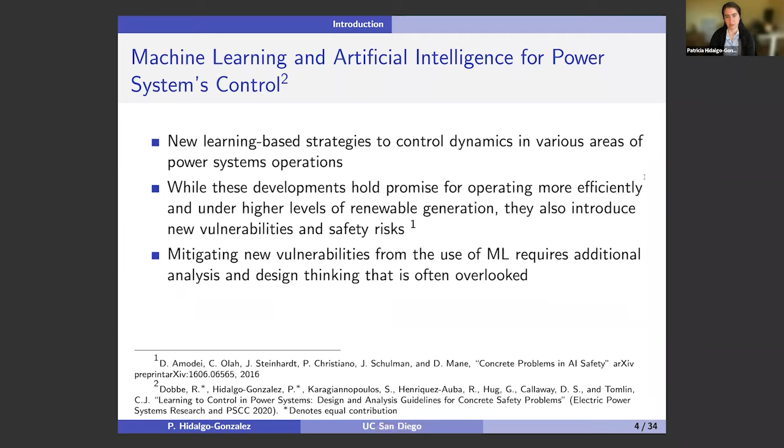But then on the other side of the coin, is that given that we're using now these data-driven methods, they bring vulnerabilities and safety risks that we didn't have before when we were only doing model-based approaches or engineering approaches in the classical way that we used to think. So mitigating these new vulnerabilities from using these machine learning techniques requires extra analysis and design, which sometimes tends not to be done in this intersection, and we need to start doing that more and more.

And there are many examples in this space, and in particular, in this paper that I'm basically talking about today, we do have a large section where we go over the different domains in power systems where these learning techniques have been used for controlling different actions in different contexts, for example, frequency regulation, voltage control, OPF, demand response. And there we look at those contributions from the critical lens: on one hand, what are the contributions of now using these methods instead of the classical methods? But then on the other hand, looking at what are now the new vulnerabilities and aspects that are arising from using these data-driven methodologies.

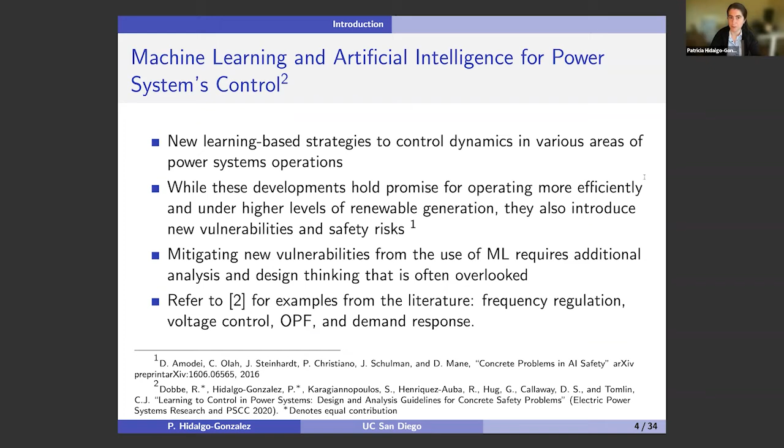So now let's review what are these risks that I'm mentioning. And from here, we take some of the language and concepts from the AI community, and we apply them to power systems. Specifically from the paper from Amodei and their co-authors, and also Leike and his or her co-authors, they characterize specific safety concerns that arise as we're all working in learning-based control, and we apply them to the context of power systems.

So the first one, it's avoiding negative side effects. So this comes from the fact that when we're using a machine learning model, it's optimizing the actions according to some objective function that we define and some constraints that we define. And usually that's going to be informed from the expertise of the domain in particular that we're applying this technique to.

However, given that we can only choose an objective function with certain characteristics or design, and the same for the constraints, we will never be able to capture all possible behaviors of our physical system. And that could bring some aspects of getting into an area that we haven't explored, that we were not able to model with the constraints that we have. So then that makes our algorithm not robust, no matter what's happening.

Another risk that's super important when we're looking at machine learning techniques in the context of control for power systems is to make sure that we're doing persistent excitation and safe exploration. The question this poses is how can we make sure the training data we're either obtaining or creating represents all the possible conditions we could be under, especially the safety critical cases?

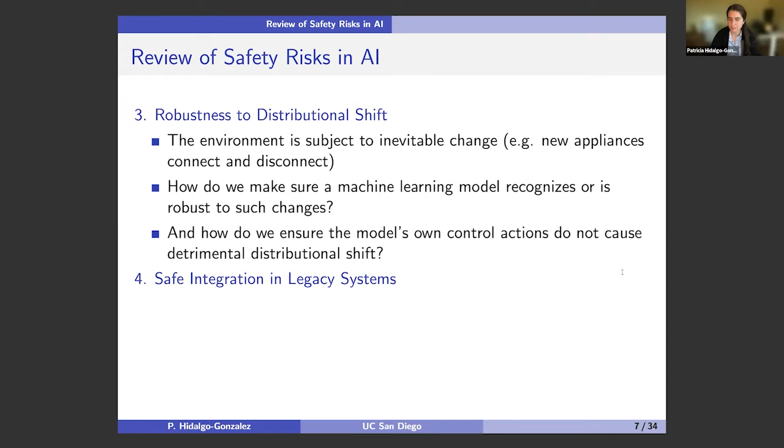And last but not least, here in power systems, we're working with a legacy system. And that brings a new set of challenges, which other types of domains don't have to deal with.

For example, in robotics, when you are implementing machine learning algorithms to control your motion or path planning, you don't have to make sure that your controllers are compatible with a pre-existing machine, because you're basically modeling from zero, creating a new device.

But in the case of power systems, that's not the case. We are now bringing new controllers, but to an existing grid, and in many cases, that network has been operating for over 100 years. So it has a lot of different layers and aspects. We have to make sure that any new control mechanisms we bring are complementary and interact well with the control mechanisms we already have in place in the grid.

And in that regard, the other aspect is that as of now, the expert in the room is always going to be a human. So we need to make sure that the human operator can safely override any of the control mechanisms we might have, especially if you're getting into safety critical aspects that you don't expect the controller to work better than a human's experience would know. So we have to design these mechanisms in a way that the operator can take over if needed.

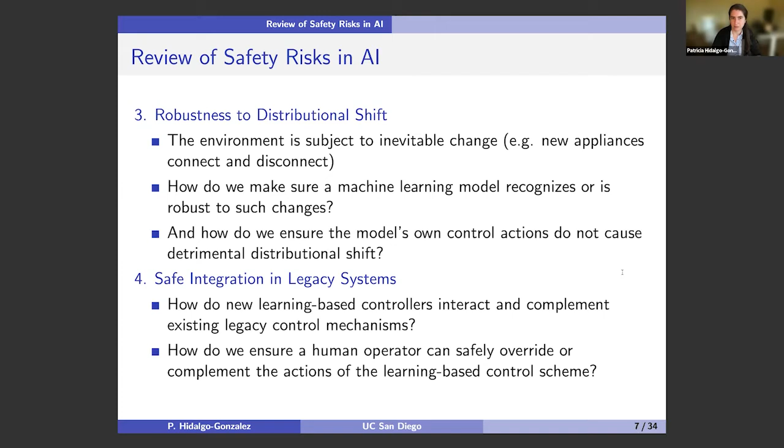All right, so now that we've reviewed these different safety risks, let's look into one case study that's looking at frequency regulation as inertia changes over time because of renewable energy integration. And then I'll highlight what the safety risks were that we identified and how we were addressing them with this case study.

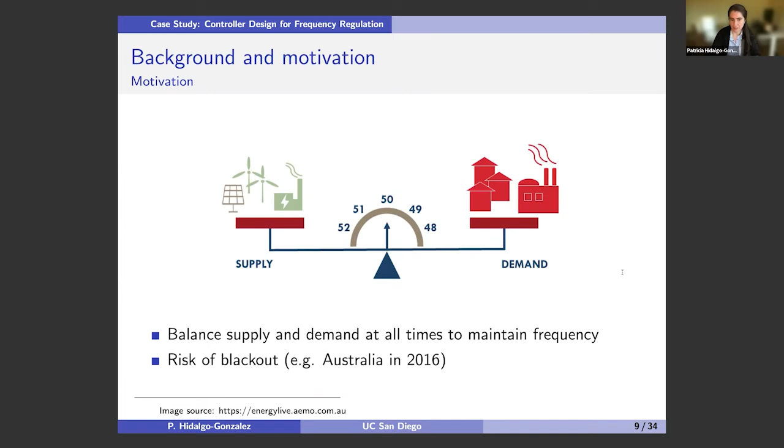Okay, so as we know, we need to balance supply and demand at all times to maintain frequency at the operational point we want it to be. And if we don't do that, we're risking a blackout. There are several cases by now, and one example was the one in Australia back in 2016.

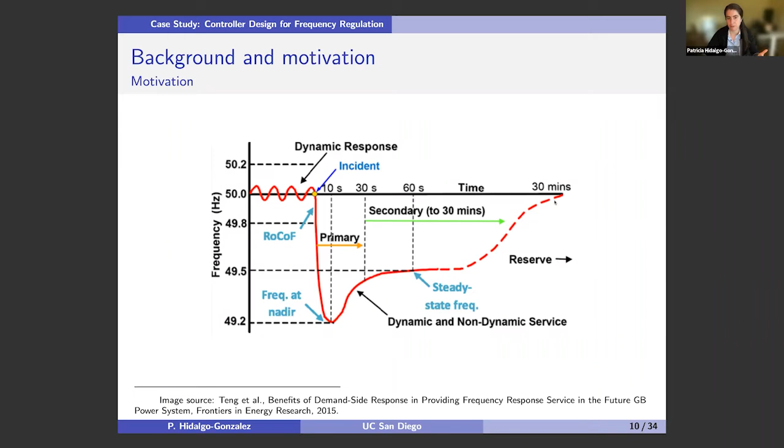Then we have different control mechanisms that kick in, such as the primary control. Then the secondary control takes over and relieves the primary control. And then we have reserves that start kicking in, and then we start redispatching. So then we can free these different units providing the primary and secondary control, and just rerun our OPF so the generators can provide and adjust to this new change.

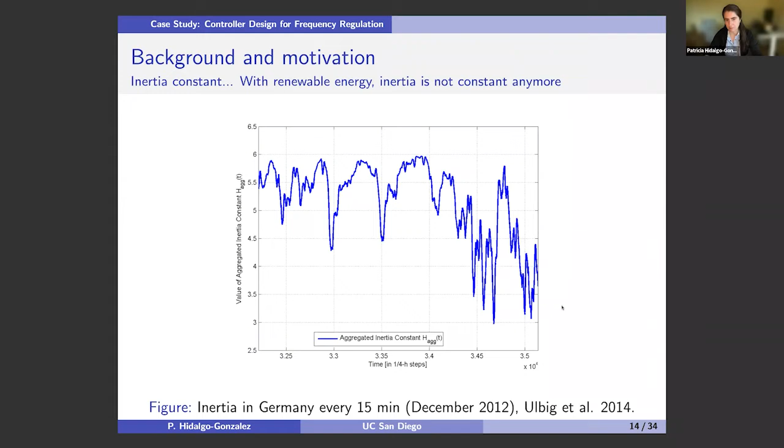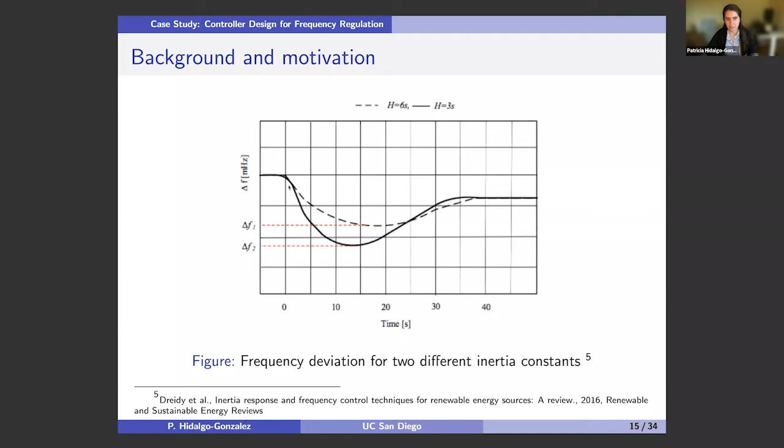So what we had before, where we assumed the term M was fixed, we cannot do that anymore. We're no longer working with that linear system, but something a lot more complex. Here's an example of what happens to the frequency response, y-axis versus time, as we have different values for inertia. When we have a higher inertia value, it provides more resistance in the grid against frequency deviation. So delta F1 in this example is smaller than delta F2, which occurs with lower inertia in the grid.

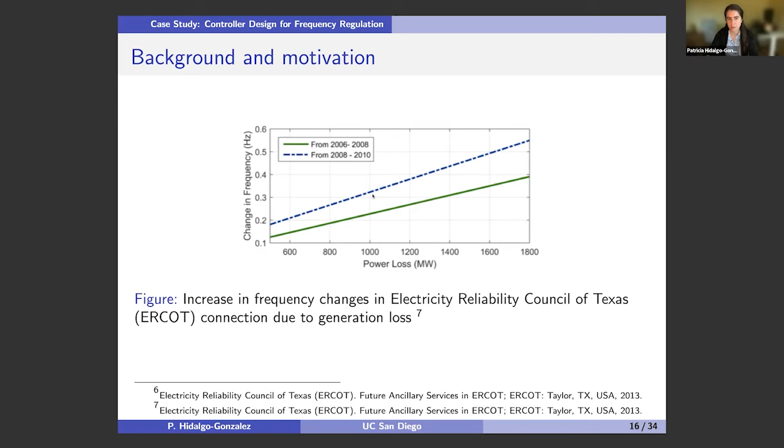And in this other example, it's from ERCOT. Even though this is data from 10 years ago, one of their reports already showed that for a given power loss, over a difference of 2 years, the change in frequency was increasing quite a bit, even though they were experiencing the same power loss. That was explained because now they had more wind power, so therefore less inertia in their system.

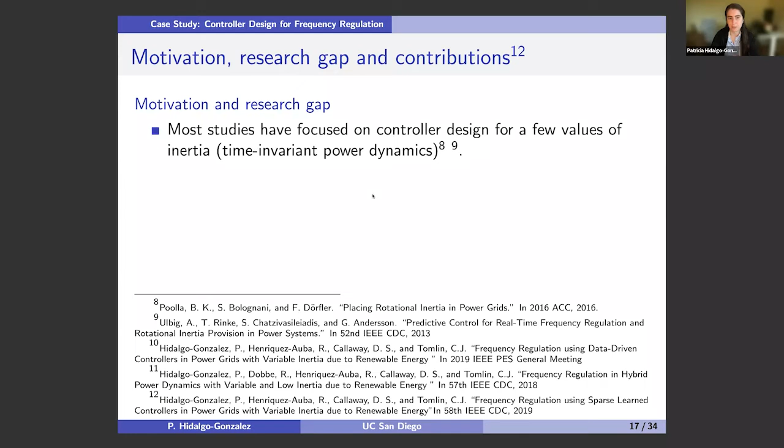This brings me to the research gap that this case study was addressing. Most studies have been focusing on controller design for a few values of inertia, but they were assuming that the dynamics were time invariant, basically assuming that inertia was constant, and then testing it for a few different values.

In previous work, we were able to design via learning a fixed and stable frequency controller, but now for these new time-varying dynamics that I'll introduce shortly. These new dynamics that we're proposing do capture how inertia changes over time, so we can have controllers that are robust to that time-varying aspect, given that we're not working anymore with a linear system. The next part of the contribution is that we are aware that information entails a cost, because we need to sense the information and then broadcast it. So designing sparse controllers, that require a low amount of information, is something we do desire in power systems.

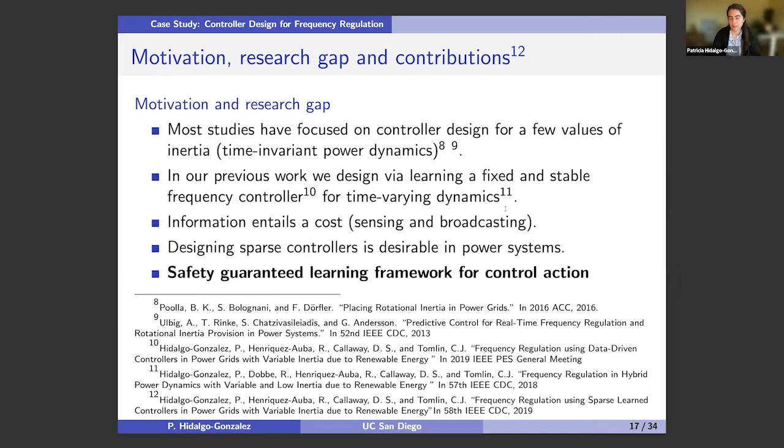With that work and motivation, we're able to propose a framework that has safety guaranteed when you're learning a controller in the context of frequency regulation. So we're able to design a sparse and guaranteed stable time-invariant frequency controller for the new time-varying power dynamics.

We also test the improvement in the performance of that controller and in the stability as we introduce more features for the controller to use, or give the controller more access to information. So we can understand that trade-off between having more information and better performance and stability, versus having less information and how that affects our performance.

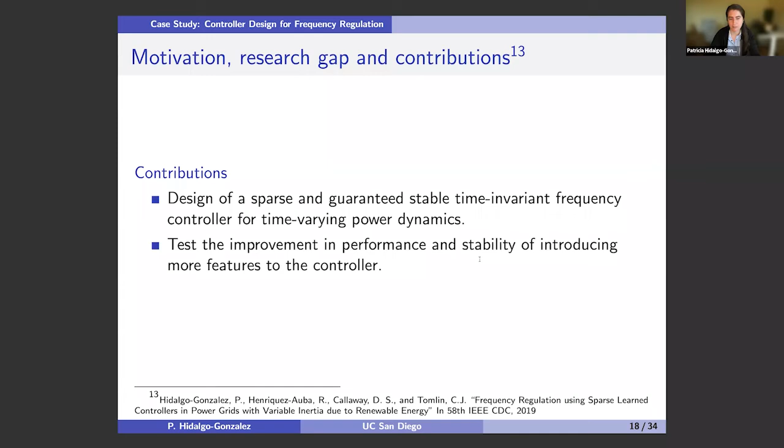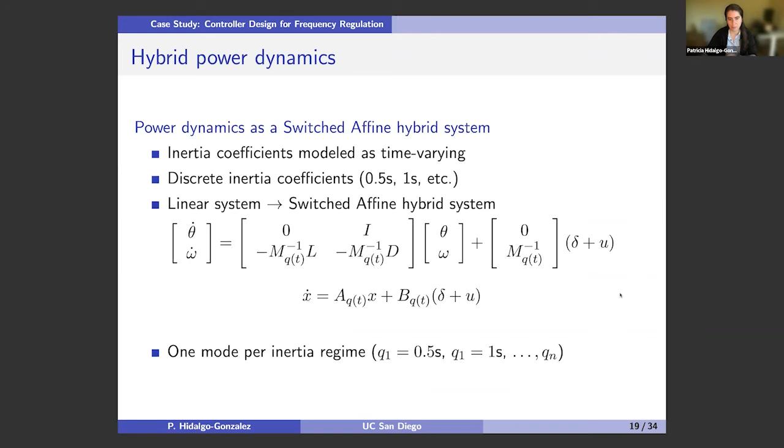So classically, using matrices A and B, they're going to be time-varying because of the inertia changes over time. This would be our matrix A, our matrix B. We're using one hybrid mode per inertia regime, going from low inertia, as low as 0.5 seconds for example, all the way to a high inertia of 9 seconds. We let inertia change over time in our simulations, and we design a controller that would be able to bring frequency back to the nominal point, regardless of how the inertia evolves throughout the day, for example.

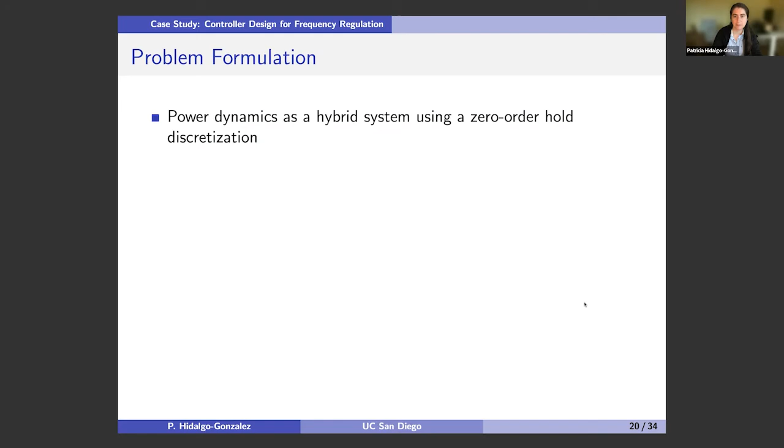So now, formally talking about the problem formulation. We're modeling power dynamics as this hybrid system, using a zero order hold discretization. We represent with X the vector of discretized angles and frequencies.

We generate a training set from solving the MPC for this frequency regulation problem. Given that X measures the deviation from the nominal points for phase angles and frequency, we want to minimize that deviation. So we minimize this quadratic expression because we want it always as close to 0 as possible, and we're also minimizing the usage of our control action, using it the least amount possible to minimize cost.

Our control action would be power injection or power absorption if we have a battery, for example, depending on what's happening with our demand, so we can always match our supply with our demand.

Then the constraints are the dynamics of our system. We have an initial condition for the states, where our frequency is starting and where our phase angles are starting, and then basically the dynamics of our system.

Here we're working in discrete time, so we can capture how our states are going to be changing given a certain initial condition. We assume the initial condition to be removed from the nominal point, so we start in a safety critical operational point with the frequency deviated by a certain amount.

From solving that training set, now we want to fit a controller via learning, because in reality, in frequency regulation, the dynamics are so fast that we cannot implement a real-time MPC to control that type of problem. So this is just for training, creating the training data set.

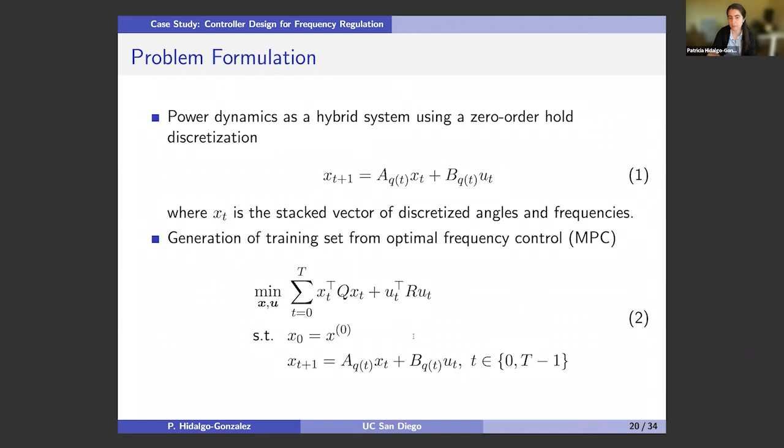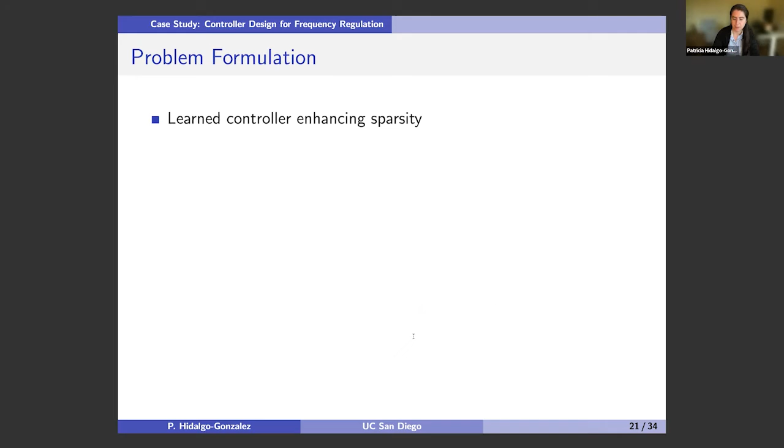The objective of our controller is that we want to learn a controller that enhances sparsity, so it doesn't require as much information from the network. We want to understand to what extent communication between the nodes can be restricted, and still be able to design a stable frequency controller.

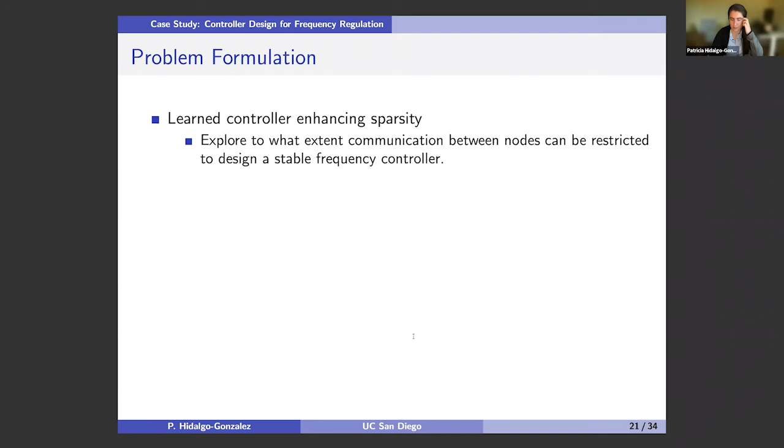Meaning, do we need information from, say, the nearest 3 nodes around us, or do we need more information, the nearest 5 or 10 nodes, depending on our topology? That's the question we explored.

To understand that, the strategy we use is to create this optimal training set from solving the MPC I just showed. From that MPC, we get optimal pairs of states and control action for a set of different scenarios S.

These scenarios capture different trajectories for our inertia, in different ways that matrices A and B from the dynamical system can change, rich enough to capture a wide variety of possible evolutions of the inertia in a system. This scenario S also captures different initial conditions for our system.

Basically different critical operational points where our frequency was deviated by a certain amount of hertz, for instance, so we can learn what to do in that critical case so we can go back to the nominal point.

Using this training set, we can learn, or try to fit, a controller that is linear on the states. To do this, we use a lasso regression for each node I in our network.

We assume that each node can have its own independent controller, which is why we're indexing it by I, the node, as a function of time, and we're hoping to fit a controller that would be linear on the states of the entire system.

We're trying to find this vector beta I, and we'll have a specific vector for every node I that we have, so a specific controller per node, and this vector is constant.

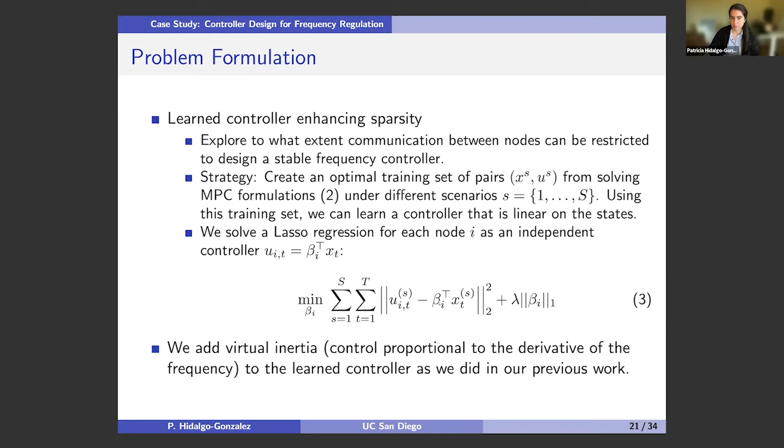Here we're posing the lasso minimization, where we're trying to fit from these optimal pairs obtained from the training set from solving the MPC. We have optimal control action and optimal state, and we're trying to find this vector beta for all the nodes I, penalizing the components of beta using the one norm on it.

And then we're penalizing with a certain weight lambda. We're using the one norm because this gives a binary behavior for the resulting beta, where the components are either going to be non-zero or 0. This is not the case if we would have used the 2 norm, which doesn't have that binary behavior.

So you would have some components in the vector beta that could be like 0.03. With that type of number so close to 0, it's not as helpful, because we want to force using the least amount of information. So we want to penalize the one norm so we can have more binary behavior from the controller beta, meaning that in some cases we're going to have, let's say, 5 non-zero components in beta, and they're not going to be close to 0. And for other components, we're going to get exactly 0.

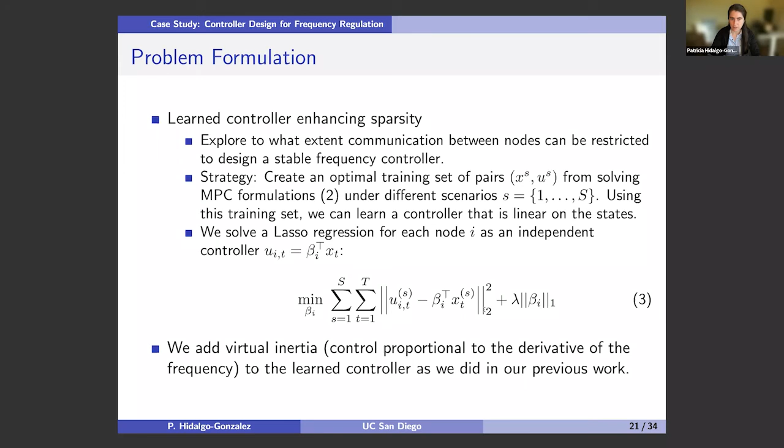And then after fitting this linear controller, we add virtual inertia, which is a control proportional to the derivative of the frequency, as we've done in our previous work.

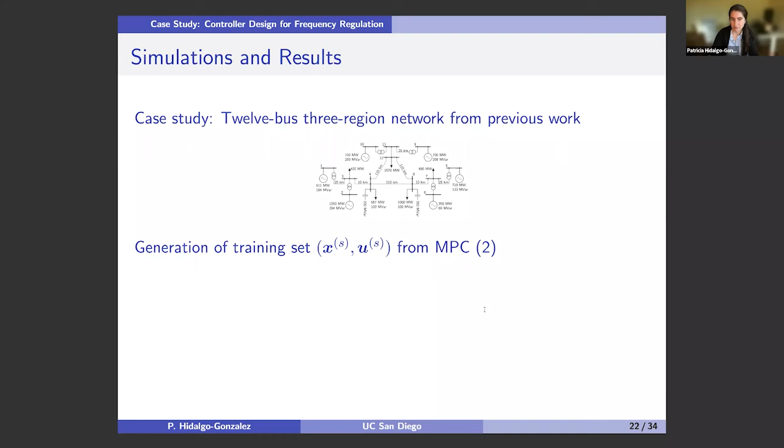So first we create the training set where we get optimal states and optimal control actions from the MPC. And here are the parameters that we use for the simulations.

And then for each scenario, we are randomly drawing an initial condition for the frequency deviation with a normal distribution with mean 0 and standard deviation 1.3 Hertz. So this is rather aggressive in terms of frequency deviation.

And then we simulate 400 scenarios to be able to capture a rich enough data set on how the inertia could change in the system. Then we assume that to be exogenous, we're not modeling that—that's happening also randomly. And also so we can have a rich set for initial conditions of frequency deviation.

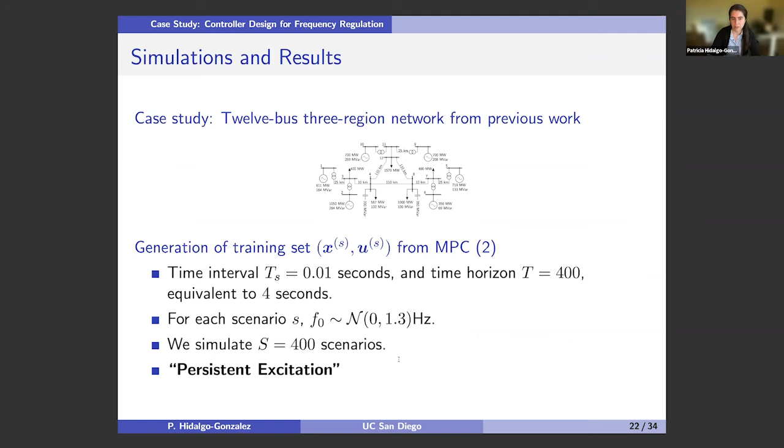So with this, we're trying to use this concept of persistent excitation, by trying to have more cases, or a rich training set of different conditions that we could be facing.

And now in the part of learning the controllers, we're optimizing the lasso regression, and we're using 100 possible values for the regularization parameter lambda. That's basically penalizing how many components cannot be 0 in our vector beta. And we use a tenfold cross-validation so we can get robust results.

And then from that experiment, for our analysis, we choose a subset of controllers. Specifically, we choose this controller by the number of features that they're using. So we use the case of when you only are using 4 input features in your controller, when you're only using 5, then 6, 10, all the way up to using all the 22 states that we have in our network.

And these 22 states come from the fact that we have a network that gets simplified to an 11-node network, and then each node has 2 states, the phase angle and the frequency, as I was mentioning before.

And then to all the learned controllers, we add virtual inertia as in our previous work. And this goes in hand with the concept of trying to avoid negative side effects. I'm going to get into a little more detail on this one as we go through the analysis of the results.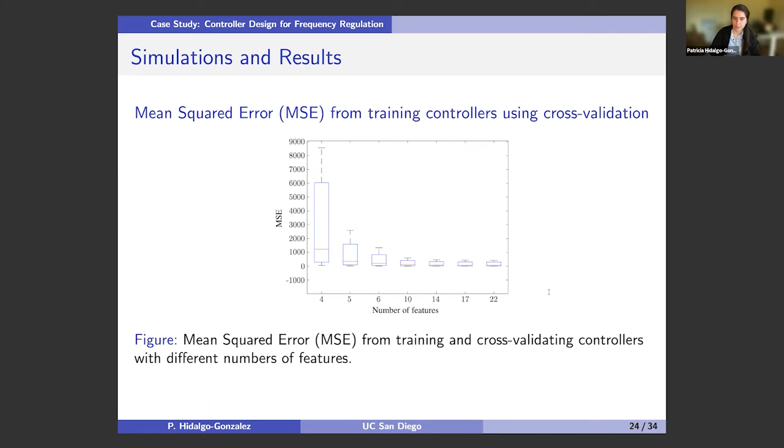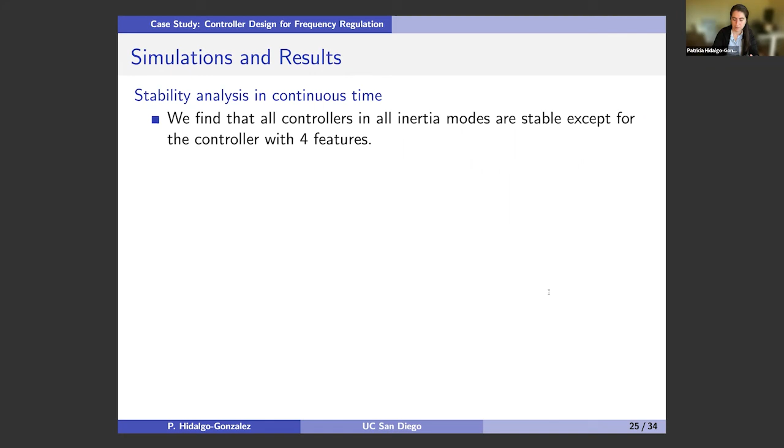And now we're fitting this controller for a dynamical system. So we need to look at stability to make sure that we're using a good controller for our dynamics. After fitting these controllers, we realized that all the controllers in all the inertia modes were stable, except for the controller using only 4 features.

To guarantee stability in a linear system, we need the real part of the eigenvalues on the left-hand side of the plane—basically negative real numbers. All of them are on that side except the controller with 4 features, where some values are positive. So the system's not stable in that case.

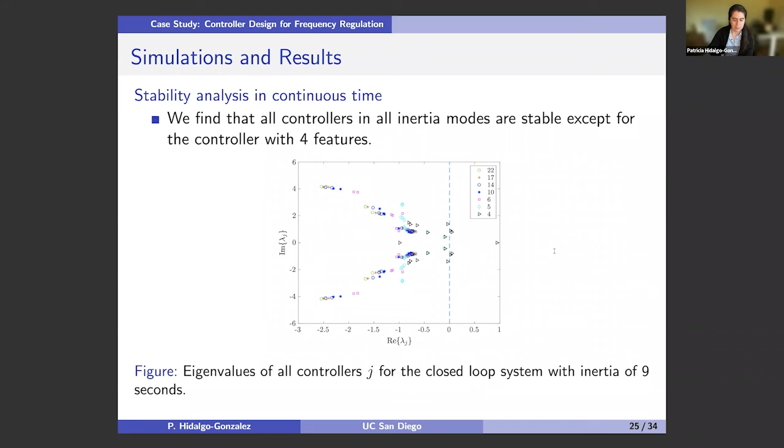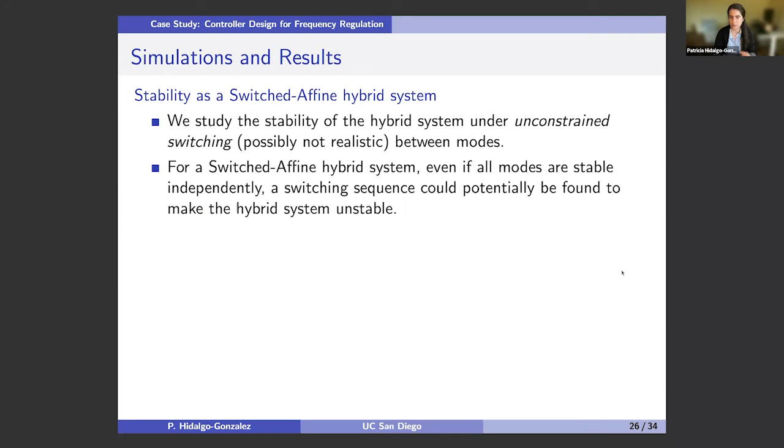But that being said, we're working with a switched-affine hybrid system, so now we need to understand stability for the hybrid system under any possible switching. We know that even if all the modes are stable independently, there could be a switching sequence that brings instability into the hybrid system. So we need a different framework to assess stability for the hybrid system—for that, we use the Lyapunov approach.

We're trying to find a common Lyapunov function that ensures global asymptotic stability. We can do that by solving this convex optimization problem, where these constraints force the matrix P to be positive definite, so it complies with being a proper Lyapunov function.

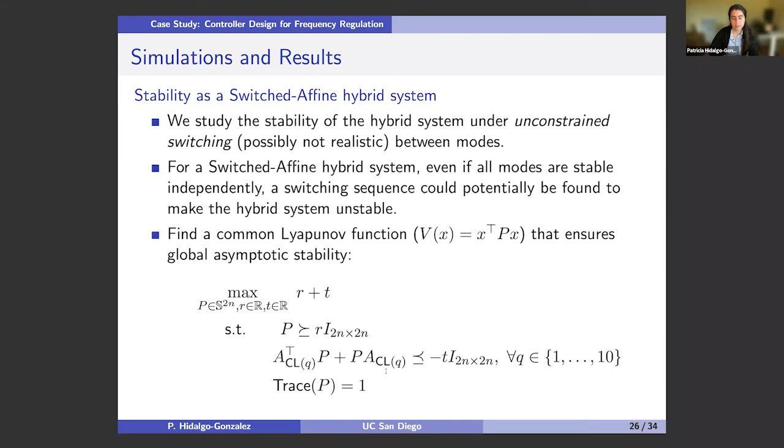This matrix here is the Lie derivative of the Lyapunov function, and we're forcing it to be negative definite. So in the end, if we're able to find a positive R, this P would be positive definite. And if we're able to find a positive T, this derivative of the Lyapunov function would be negative definite. We will be able to say that we are stable.

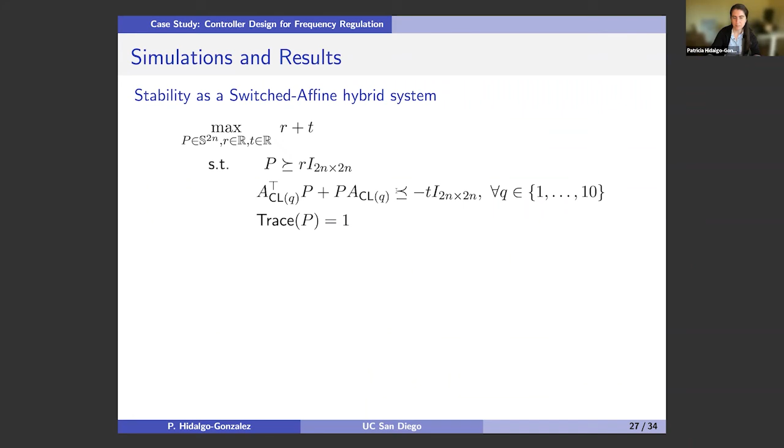So basically we would be guaranteeing global asymptotic stability. Here's just written what I was saying: positive R forces P positive definite, and positive T forces the derivative negative definite. So we will be able to guarantee global asymptotic stability of the system.

So now let's see what happened numerically with the dynamics and controllers we designed, which is all captured in this matrix A_CL for the closed loop. This constraint is for all the modes of inertia that we have, so we can find a unique Lyapunov function for all the modes.

So a unique P. In this case, we realized that controllers with only 10 features or more achieve this global asymptotic stability, but we can't say the same for those with fewer than 10 features. Even though controllers with 6 or 5 features showed good performance and achieved stability on every inertia mode independently, they were not able to show global asymptotic stability when considering the hybrid system as a whole. So we need at least 10 features to truly guarantee stability in this type of system.

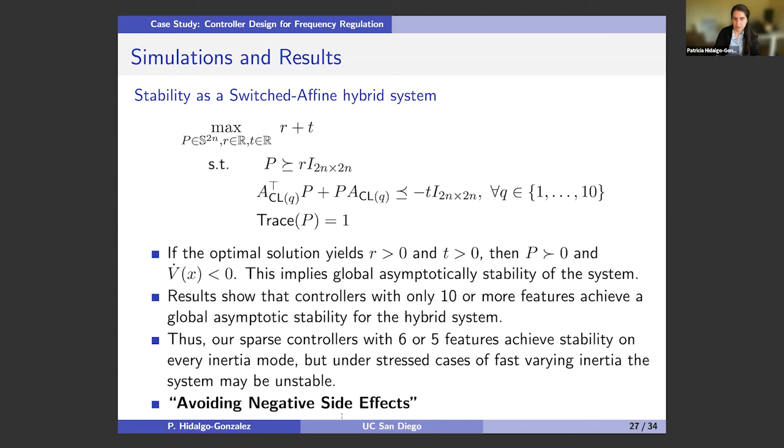By doing this check with the Lyapunov condition, we're again stressing the concept of how we can avoid negative side effects—if we don't check for stability, we wouldn't be able to guarantee anything. But with this, we're leveraging the power of data-driven techniques while also using the classical approach from control theory to guarantee stability.

So for conclusions of this case study: we were able to reduce the number of features in the controller all the way to 5 without impacting performance and stability for any fixed inertia. Increasing information beyond 10 features did not enhance performance or stability metrics. And we showed that using at least 10 features was necessary for global asymptotic stability.

So in this case study, we showcased how to avoid negative side effects by guaranteeing stability, and how to design a training set that has persistent excitation so it could be robust in the case of critical states.

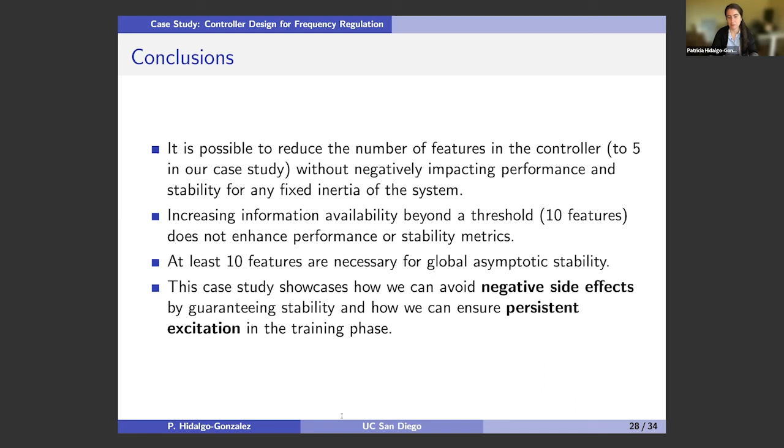Now moving into the guidelines on how we can address this safety risk, not only from the case study, but more broadly speaking. In the case study, we see the example of 2 of them.

There's a lot of work at the intersection of the question: do we want offline training or online learning? Online learning can definitely help us achieve more sophisticated behavior. However, if we just use classical approaches, they lack safety guarantees. Although now there has been some work addressing how we can embed these guarantees into online learning.

Offline methods may be easier for us to start embedding these safety guarantees that we require, either a priori, during training, or after the fact. Hybrid modeling is also becoming very popular, where we incorporate the physics of the system and the safety constraint as early as training.

Another technique to prevent this safety risk is variable partitioning. This is a way to characterize our state variables in such a way that we split them into two different groups: one that would create problems if used as input features, and another that would not. For an example of how we can do that, refer to the paper, where we looked at the challenge of policy shifting and how to wisely choose input features from our own states so we don't incorporate more challenges.

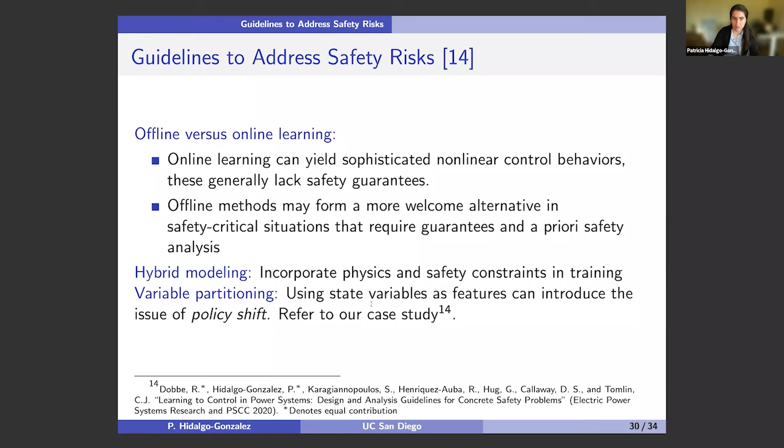Another topic that's been very popular in the last 5 years or so is safe learning. There are different ways to implement this. One idea is to first identify the unsafe set of states and control actions we want to avoid, pre-calculating that offline, basically where we don't want to be. Then we construct a safety controller based on that, for example using reachability, and switch between learning or exploration mode and safety control as we approach the boundary of the unsafe set, so we can avoid getting into it while still leveraging the benefits of online learning otherwise.

The other approach that's very popular, and I think has a lot of promise, is embedding these stability guarantees already in the training, or adapting the controller after training, as I showed in the case study.

In the case of power systems, given that we're working with existing infrastructure, we should design controllers that are interpretable and have few input variables. That makes it easier to interact with system operators, because if the controller can be interpreted and isn't a black box approach, we can have more trust from operators and the expertise around power systems, rather than a black box approach that brings more risk since less analytical analysis could be done. Using fewer variables is also desirable, giving us a less intricate controller that's simpler to analyze and implement, given this cyber-physical system has already been in place for several decades.

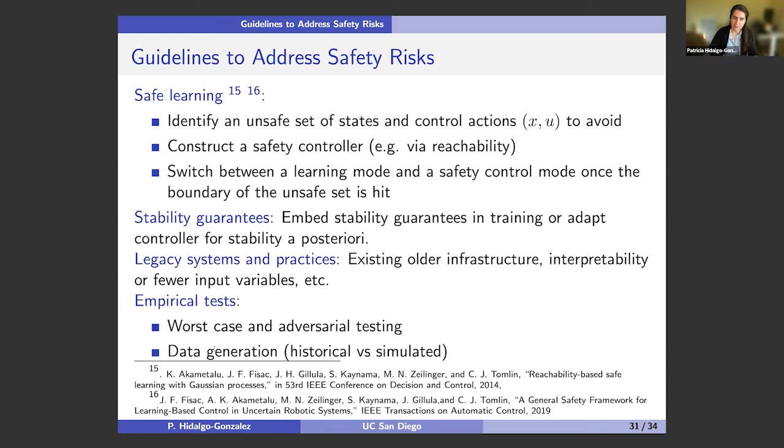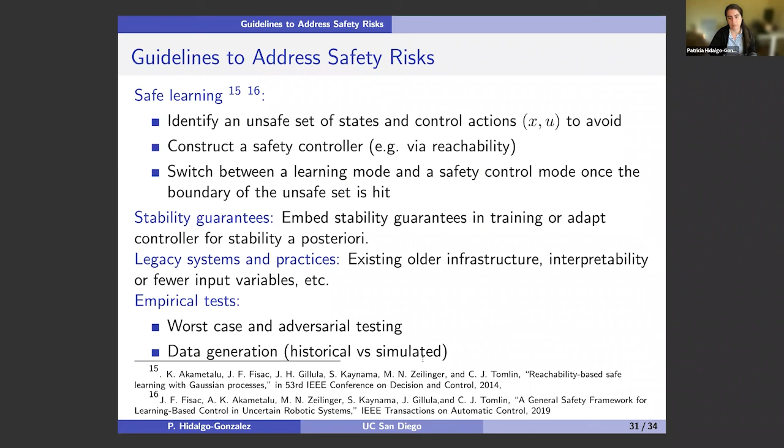In terms of empirical tests, we definitely need to look at the worst case scenario and even take it further with adversarial testing, to make sure our controllers are robust. We also need to be mindful of how we generate the data, as I discussed at the beginning of the talk, how we can use historical data and simulated data to get the best of both worlds, and how to think about what happens if we're biased in the training data, and how to approach that from the controller design perspective.

With that, I would like to acknowledge my collaborators. With them, we proposed this framework and we have been collaborating since.